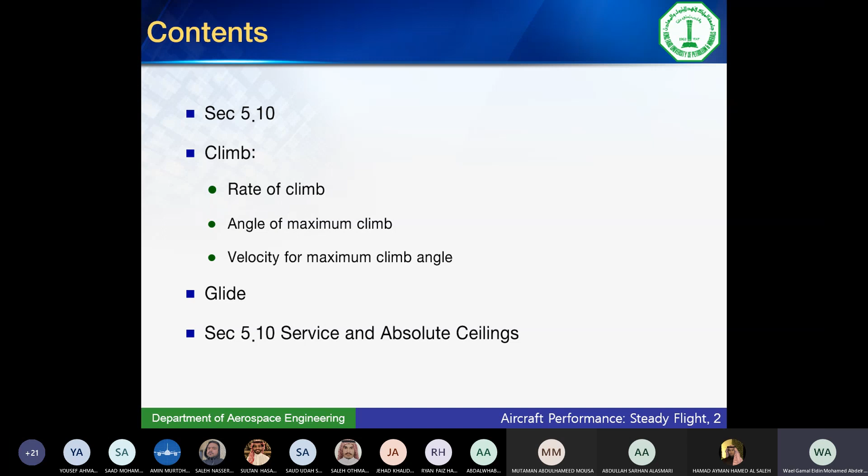So let's start our non-level and steady flight. That means the aircraft is climbing at a constant speed, and it's making an angle theta with the horizontal. And in many cases, students would confuse this angle theta with the angle of attack. Okay. Let's say the wing on this aircraft is attached in here, and the chord line is along that axis. What is the angle of attack of this aircraft?

0. Okay, it's very important to realize that, as I always tell your colleagues, you have graduating engineers who would make this very simple mistake. The angle of attack of this aircraft is 0 if the chord line is along this line, because the angle of attack is the angle between the chord line and the free stream. And the free stream is determined by the direction of motion of the aircraft. If theta is the angle of attack, that means this aircraft is moving to the right. Okay, so it would be an angle of attack of 20 degrees, 30 degrees. Very few aircraft would fly at these angles.

In fact, some superior aerodynamic aircraft can fly at very high angle of attack. MiG-29, Sukhoi 27s can have a 90-degree angle of attack for a few seconds. Okay, so the aircraft could be totally vertical but moving to the sides, or could even be a little bit inverted. Angle of attack would be 120 degrees for this aircraft, and you can YouTube them and see them doing these miraculous things.

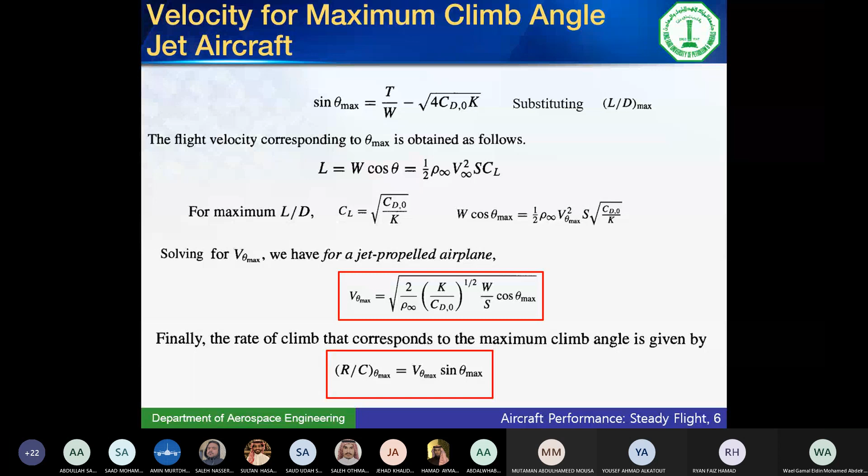I think the aircraft will stall. Yeah, the aircraft will stall before you slow it down to 80. That means you cannot climb at this maximum angle, and the maximum angle will be determined by the stall speed, not by the calculations that we have done. Okay, so there is a caution in the calculations. Once we calculate this V theta for the propeller or this V theta max for the jet, we need to check that it is above the stall speed, because if it's below the stall speed, this is an incorrect result.

This result comes only from equilibrium of forces. It doesn't include the effect of aerodynamic stalling. Okay, so that means the aircraft will not achieve the 20 degrees maximum angle. Maybe it will fly at 18 degrees maximum angle of climb. Again, maximum angle of climb, not maximum angle of attack. That's totally different.

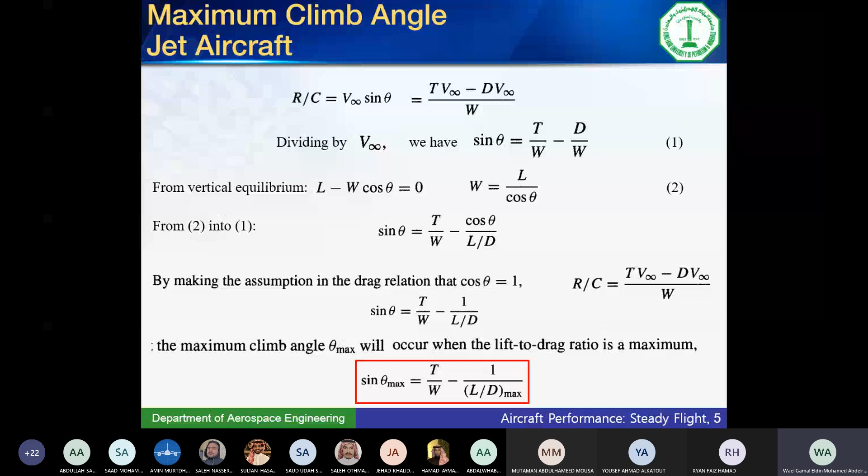When I say it will stall here, for example, this aircraft will stall at this maximum angle, not because the angle of attack is this 20 degrees. No, because the stall speed at zero angle of attack is the speed it's flying. It's because of its low speed, not because of the high angle. Is this clear? Repeat the point again. We say in order to achieve maximum angle, the aircraft has to slow down, right?

V theta max is less than V straight and level. We found that it might be slower than the stall speed. Assume the aircraft is going like this. It's going like this, and the air is coming like this. And I'm telling you, it will stall.

Now that stall is not because the angle of attack is very high, because that's not the angle of attack. The angle of attack is actually zero. Speed is coming like this, the aircraft is flying up, the chord is along the speed, the angle of attack is zero. It will stall because the speed is low. For every angle of attack, there is a stall speed. Does that make sense? Yes.

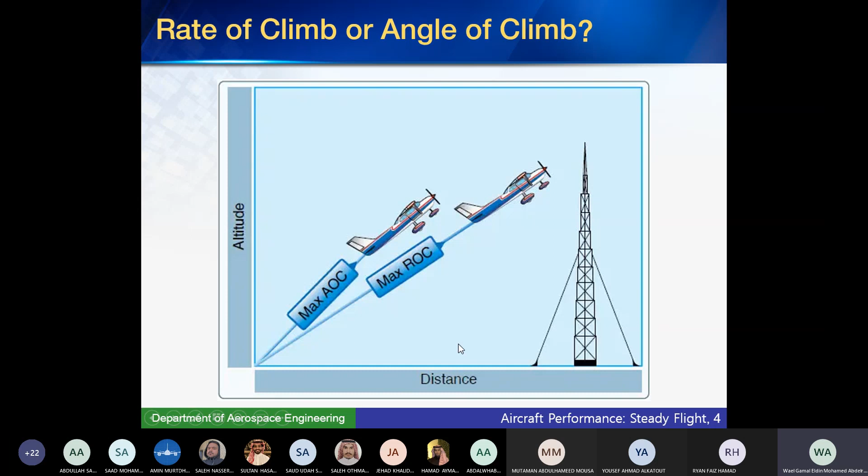Okay, so let's say the aircraft is flying straight and level. Straight and level has a certain angle of attack and a certain stall speed. If it's climbing, the speed could be lower than the stall speed. Of course, physically that cannot happen, so it will not climb at this angle. It will climb at a lower angle. So that's the caution that we have here to bear in mind. Okay, any questions?

Now we have a final issue related to climb that we are going to tackle before we look at our example. Now we're going to look exactly at the opposite of climb. Rather than the aircraft going up, the aircraft will be going down, but not with powered flight, but with all engines failing. So the aircraft is gliding downwards without a sound, no engines are running. They all failed and the aircraft is going down.

So the question will be, what would be the angle of descent? Not the angle of climb, the angle of descent. And what would be the range of the aircraft before it hits the ground? How far can it go? If you have been a movie fan, you probably have seen the Sully movie with Tom Hanks, whose main theme was basically this issue: the angle of descent and whether the range of the aircraft was enough to land on an alternate airport nearby, or he made the right decision by ditching the aircraft into the river.

Okay. So the gliding condition is a constraint and requirement on all aircraft, mainly transport aircraft, of course. If the aircraft loses power, it should be able to fly for a certain distance. And to maximize that distance, we have to minimize the descent angle. Of course, we wish the aircraft could fly straight and level, but we know that will never happen. It has to go down, but let's keep it as shallow as possible. Let's keep this angle as small as possible.

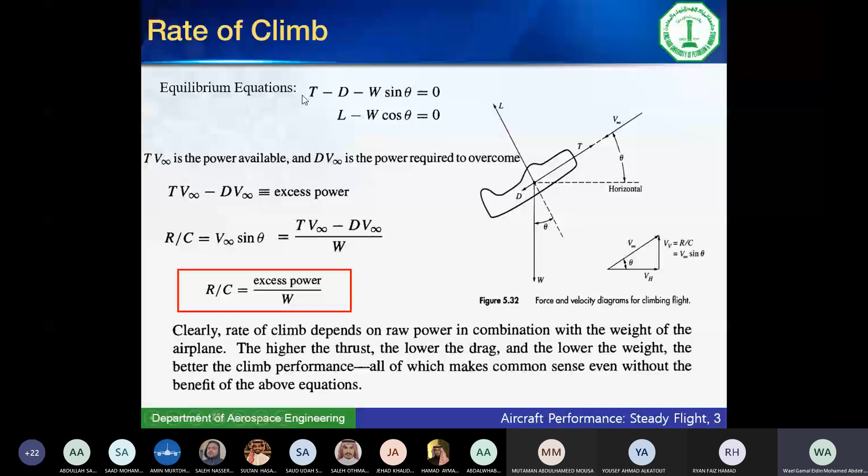So in order to find the calcs for this, we will also use the equilibrium equations. These are exactly the same equations that we had before for climb, except that there is no thrust in this case. T is 0, so we end up with two simple equations. Since we got thrust out of the picture, I can divide and get tan the angle, and that will be D over L because W will cancel. And it is as simple as this.

The angle of descent of any aircraft is simply: tan the angle is the inverse of L over D max. And L over D is a function only of the drag polar, CD naught and K. So tan theta is the square root of 4 CD naught K. That's why the drag polar is so important. It determines how shallow the aircraft will glide down to Earth if engines fail.

Okay, and if I have this angle, I can get the speed right away from the speed equations we had before. Substituting the angle, I get the speed to be the square root of 2 W cosine over rho S CL, the same expression as before, but now with a new angle. Now, this is the speed if you want to fly with that angle. The pilot does not adjust the angle, it's not up to him. This angle is determined simply by gravity and aerodynamics.

The pilot can adjust the speed. If he gets that speed, he will fly with that angle. And that will give him the longer distance he wants to get to an alternate airport. How can a pilot adjust speed if he has no engines?

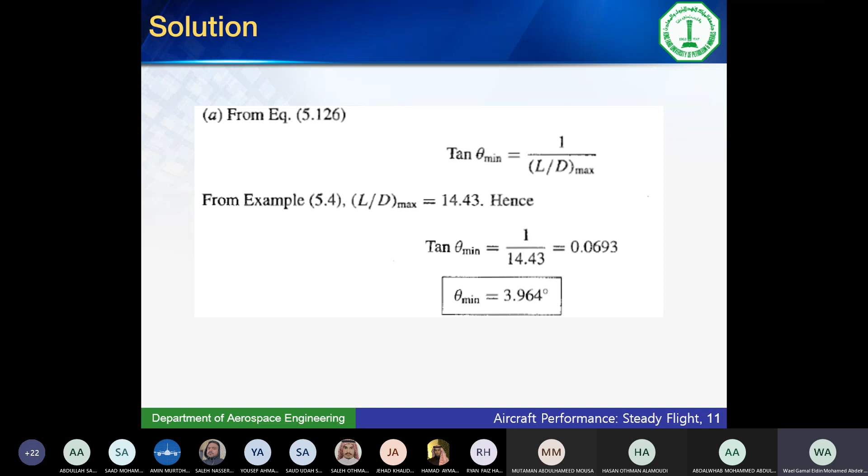And you cannot plan on this, it's variable, and you have to fly ahead of the wind. What if the airport is behind you, in the opposite direction of the wind? You cannot design on wind.

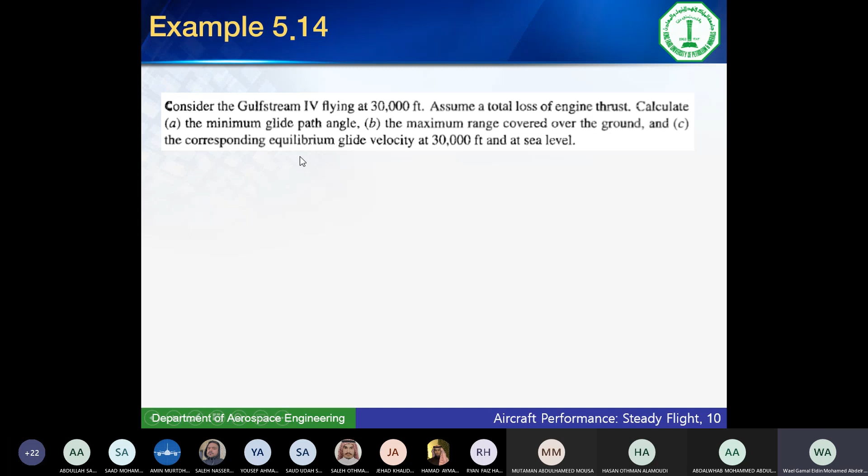So we have seen the angle, we have seen the range, and the last part would be the speed. What's the speed to achieve this angle and this range? So we need to look into the equation. This is a jet aircraft, so I need to use the equation of the jet aircraft, the one that we derived, not the approximate one of the propeller, but the one for the jet.

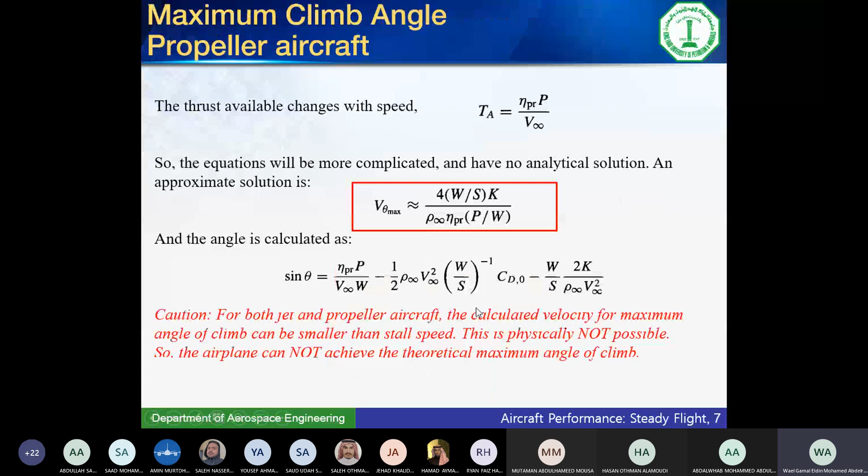So here is the formula of the speed. W/S we have, K and CD0 we have for this aircraft from the drag polar, and he's asking about 30,000 feet. So putting the density at 30,000 feet gives me a speed of 631.2. So the pilot can get the 82 miles if, when he flies at 30,000 feet and loses power, he makes the speed 631.2. As he goes down in altitude, the density will increase and that speed has to go down.

So at 20,000 feet, he needs to change the speed, slow it down, until sea level. If you put the density here to be the density at sea level, the speed will be 386.4. That's what will give him the 82.

If for whatever reason, at 30,000 feet, he flies not at 631, but at 700, well, he can fly at 700, but that's not a good thing. He will go steeper. So he will have an angle more than 4 degrees, and he will end up not getting the 82, maybe getting 75.

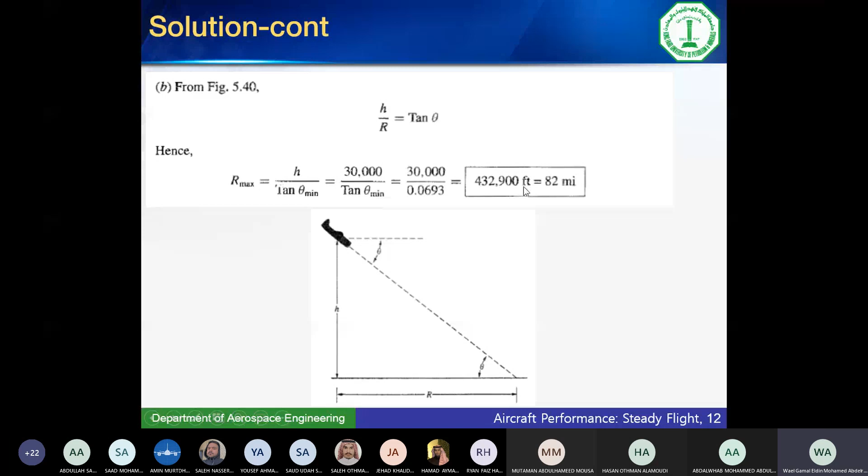So in order to get the 82 and the 4 degrees, you have to keep going with the speeds calculated from this equation at each altitude. So they have to change a little bit every now and then. So he has to adjust the elevator setting as he goes down. Any question on this problem? Okay.

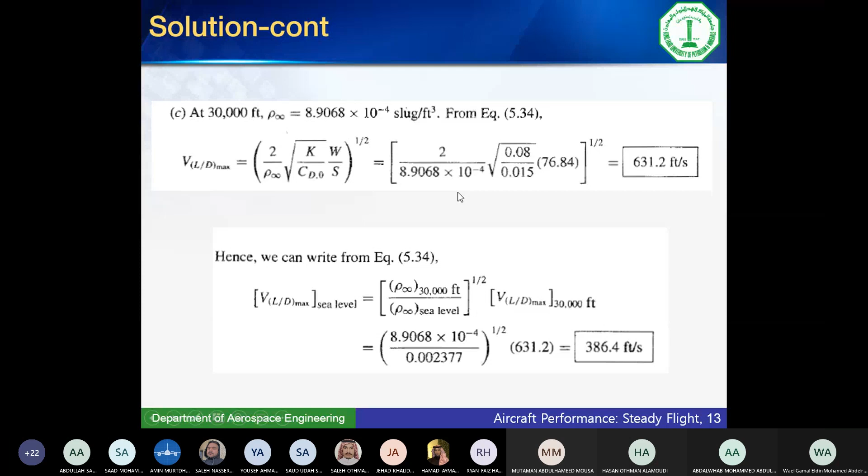The last topic that has to do with climbing and gliding and changing heights is the ceiling. Ceiling is the maximum height the aircraft can reach. And engineers have a way to define the ceiling. We say when the aircraft is on the ground, that means altitude is 0, it has a certain rate of climb.

Sometimes it is required in the design. It's specified. So you say the absolute ceiling of this aircraft should be 45,000 feet. Okay, so now I have to work with the absolute ceiling. However, in most design requirements, it's not the absolute ceiling that matters, it's the service ceiling. Service ceiling is a little bit below the absolute ceiling, and it's defined as the altitude at which the maximum rate of climb is 100 feet per minute.